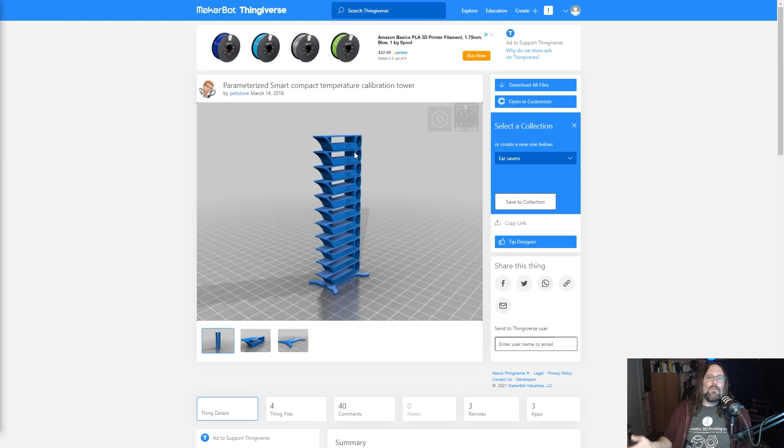If it is, it's cheap filament, throw it away. Or if you're printing some of the wax stuff, I'll give you that, it could be good filament. But if you're printing below 200, you might want to look at the quality of your filament.

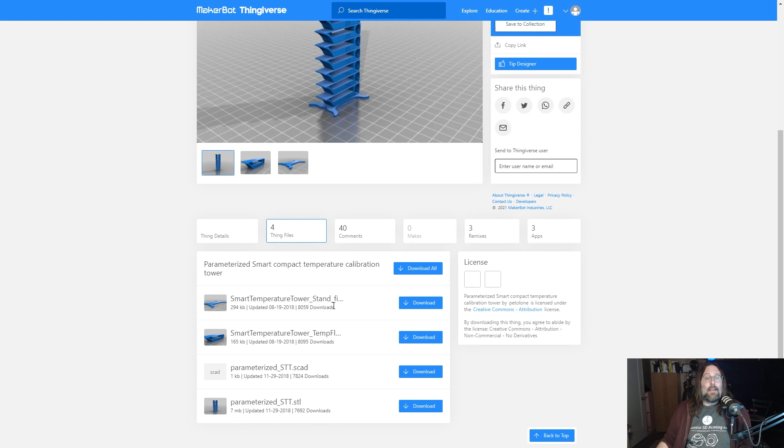The other reason I like this tower particularly is if we scoot on over to the file section, there is a file. So this guy here, this parameterized STT, it is the full tower. That's the one you see in the Thingiverse picture. It will give you the model for 225 to 175. But this is my favorite thing about the model: these three things. There's an SCAD file, and then there's a brick section for the SCAD, and then there's a smart temperature tower stand, which just stands it off the bed a little bit, which kind of complicates things, but it's not too bad.

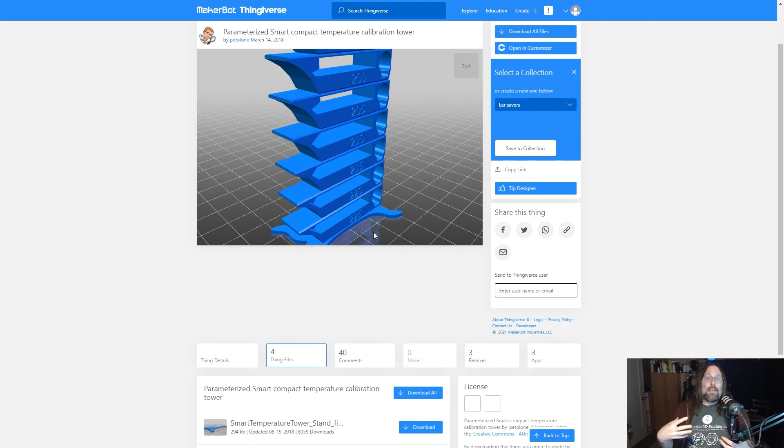But the idea of the temperature tower is basically that when you print it, the printer changes to the temperatures listed on the front of the tower. So we can see here at the bottom of my tower, starting at 225, and as I go up, it's getting hotter or cooler and cooler and cooler. Now you need to start hot to cold, because if you start it at a temperature that your printer can't extrude at, everything will fail on top of it.

Now, this particular tower does a really good job with bridging. So you can see that there's a cooling bridge that takes part, so you'll be able to see if the filament is printing warm enough to bridge or too hot, too cold. It has these nice little spikes to show you the points and how fine of detail and the cooling effect it's going to have on those points. The stringing test happens between these gaps. So that's why it's very important that you don't clean these models up, because you're not actually going to learn anything from them if you clean all the stringing off.

Now, when I showed you the example, my example only went up to about 210 degrees, and that's because I know for a fact the filament I'm printing with is between those ranges. So I'm going to download all these files, I suggest you do too, and then we're going to get right into the nitty gritty of how to do it. So just go ahead, download all these files, and I'll see you on the next screen.

Hey guys, David on the next screen here. So the next thing we're going to download is OpenSCAD, because I am going to show you a little bit about how to customize this. There are a few ways to do it, but OpenSCAD exists to make this quick and easy.

So head over to Google, grab OpenSCAD in your search, and then hit downloads. From here, we can just scroll down, and then depending on your operating system, obviously you're going to pick the one for you. I'm 64-bit Windows, so I will grab the 64-bit Windows installer and just save that. I'm going to run the installer here. There's nothing magical about it, it's probably one of the most boring installers on the planet. If you do see the UAC window, just click yes, it's just making sure you want to actually install this because your computer doesn't quite trust it. So literally this installer is you hit install and you wait a second and then you hit close.

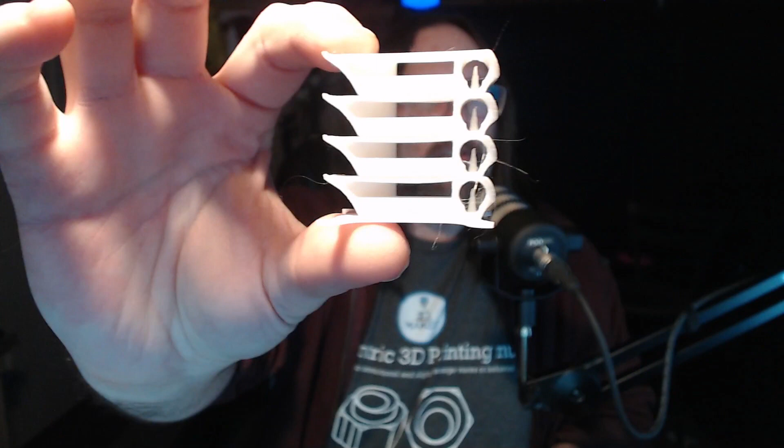I do want to make a quick point about temperature towers. We talked a little bit about why, and I want to talk about how many I've printed and when I've actually used them. This little guy here I printed for this video, and it's white and a little blown out, but you can see it's got a little stringing until it gets to the very top one, which happens to be 210, which is good news because that's what I print my filament at.

And then you can see artifacts on them as they go up and down and more stringing. I'll talk a little bit about those as we go through, but this is actually the second ever temperature tower I've printed in the 4 years that I've been 3D printing.

I like to use calibration models, and I'll tell you why in a second. When I say calibration, not necessarily benchy, like benchy and Astro Print Rocket, something that exemplifies all of these features at a temperature that I trust for most PLA.

Without going too far into it, PLA will print at its hottest when it's in its purest form, meaning the closer you are to a virgin PLA material, the hotter you have to print that filament. If you're printing your filament in the lower range between 190 and say 200, or even 185, your filament is probably not all the way virgin PLA material. It could have some recycled stuff in it. There's nothing wrong with it, but this is where it comes to knowing your brand of filament.

So the reason I haven't printed a temperature tower is because I trust the manufacturer. When I buy Protopasta, I expect Protopasta's claim of using virgin raw material, which they do. It's great filament. When I buy Matter 3D filament, I trust their claim. It's great filament, and I know for a fact I'm going to be printing in the hotter range.

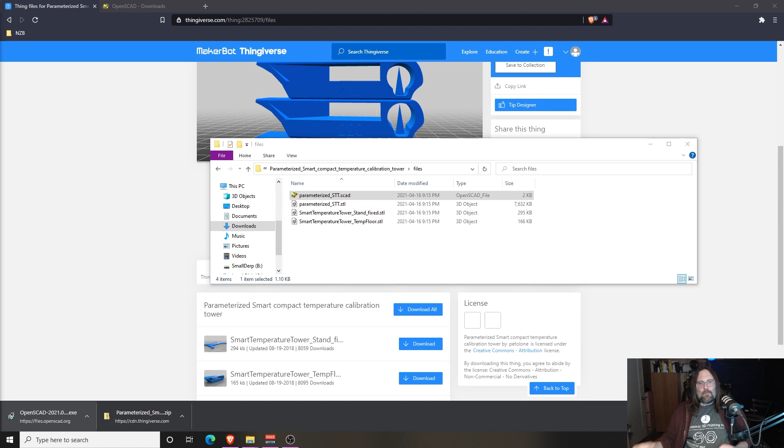So I'm going to open OpenSCAD. I just double click it. Since it's the first time, it doesn't know, so I'm just going to pick always open OpenSCAD files with OpenSCAD. I'm just going to click OK, and we'll wait for that to open up. And we are greeted with a screen that, well, basically looks like this.

Now you can see here that it's generated a temperature tower, and it's actually generated the temperature tower that's on Thingiverse.

I just really quickly want to go through a few controls so that you know how to get that image if you don't see it. Over on the left-hand side, there's a preview button, hotkeyed to F5, the square with the play arrows to the right. If you hit that, it will generate a preview of the file you're building.

OpenSCAD uses programming logic to build STLs. The reason you need those two files inside that folder is because it's using those files to stack, and then the base of the model is the floor. So it's actually calling those in this script.

We're not going to get into OpenSCAD too much. I'm just going to show you how to use this to change the size of the tower if you didn't want to go full. So let's say you want to print a quick tower.

We can open on the right side here, parameters, and you can see here that it gives us our temperatures. So we have 175 and 225. 225 is a pretty good top temperature. We don't want to play with this T-step, that's actually giving it the gradients we want as it's stacking them, so just leave that number alone.

But if we wanted our temperature tower to stop at around 200 degrees even, which would save us time, and we know our filaments for the most part like to print between 200 and 215, let's say, I'm going to change that to 200. Now you can see I changed it on this side and everything has changed, and it updated my preview as soon as I clicked off into the gray space.

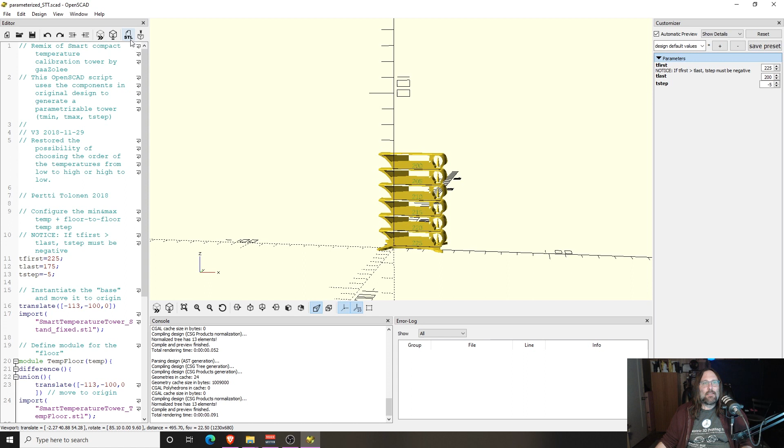If we look on the left-hand side here, there's an STL export button. If I click it, I get this error down here that says, whoops, try rendering it, press F6 — they make it dummy proof. You can press F6, or the square next to the preview button, the one with the little cursor symbol, is the render. You click that, it will render it.

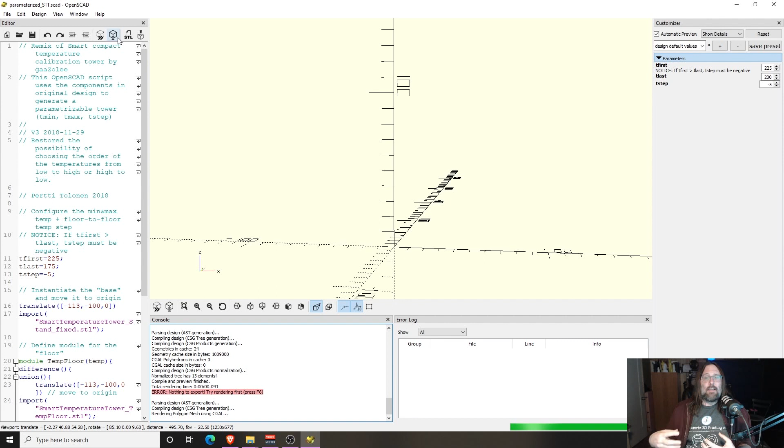It disappears briefly because it's actually making the model now, so we're not in quasi preview mode anymore. It's generating that STL — it's mending the mesh, making the triangles, putting it all together for us. Once that finishes, we can then click the STL and save it.

You're going to hear the chime, the render will show up now, and we can see that it's ready to go. We can click that STL button in the top left here. It will open the window, and it's literally called parameterized STT, which is what the other one is called, the one we downloaded. I'm going to save it into the same folder, but I'll call it new so we know which one we're dealing with.

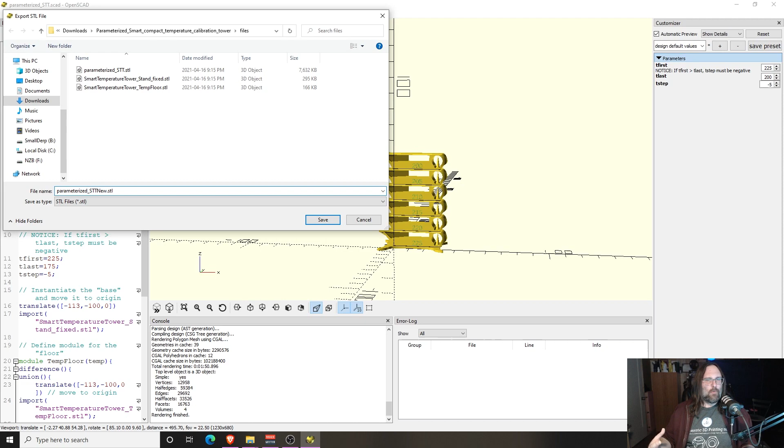So we're going to bring both files into Prusa Slicer, and I'm going to show you how the actual temperature tower script works. That's right, you use a script in Prusa Slicer — you use a script in Cura too, but it's a little more GUI based to make it. Now I've written a script that actually does this in Prusa Slicer, so I'll take you there.

We'll show you first. I'm going to open both models in Prusa Slicer just to show you how it looks. Once we're in Prusa Slicer, we do have to decide which printer we want to use these models on first. This CR10S for me is just fine, I'm going to use a CR10S — this is the default Prusa Slicer CR10S profile.

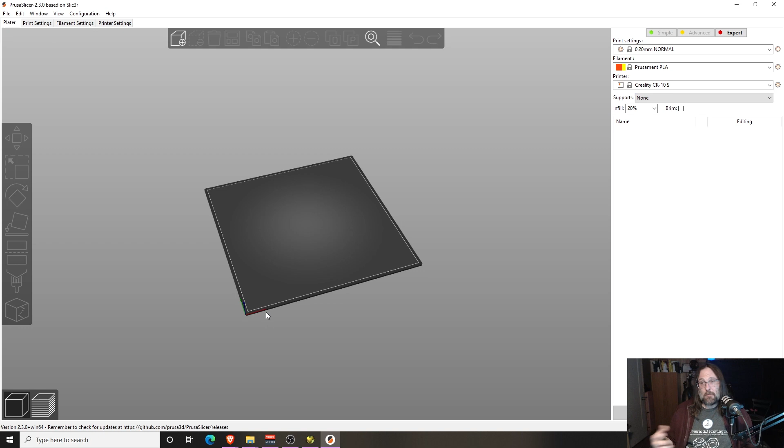I'm going to change it to 0.2 layer heights. This is also important because the script I made for this is in 0.2 increments, so we want to make sure that that script is correct.

Next, we're going to bring our towers in. So I'm going to bring both of them in, I'll just drop those in there. We can see that I have two towers, a short one and a tall one.

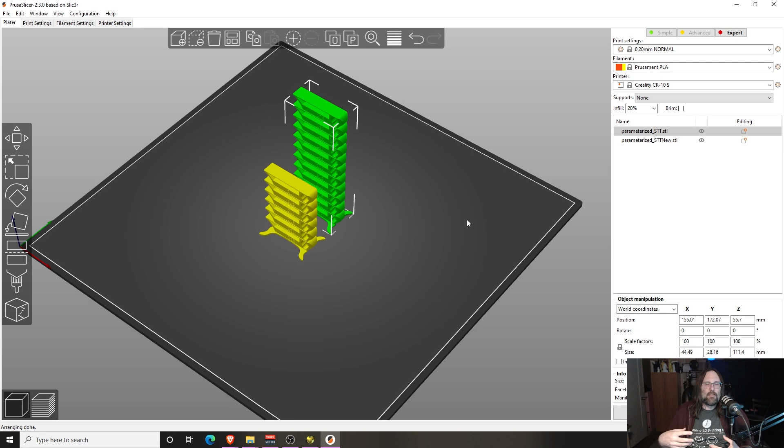If you are unsure of what filament you're using, or what the actual low temperature is, if you haven't experimented a little bit with that brand or type, do the tall tower. The worst that happens is it starts failing at the lower temperatures, so the higher blocks. Other than that, they will both work.

I'm going to delete the small tower. We'll continue the example with the big tower for now, and we'll hide the small tower — we'll hit A, and that'll take it off the build plate.

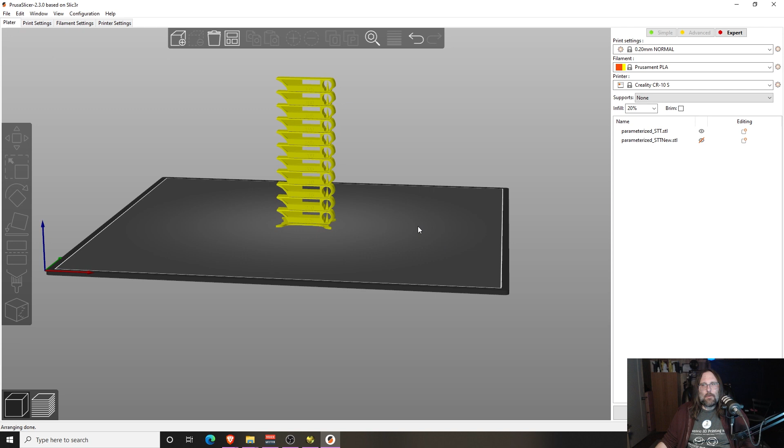It actually just moves it off to the side if you're not familiar with what it does. So as soon as you hide it and arrange the models, it moves it off to the side.

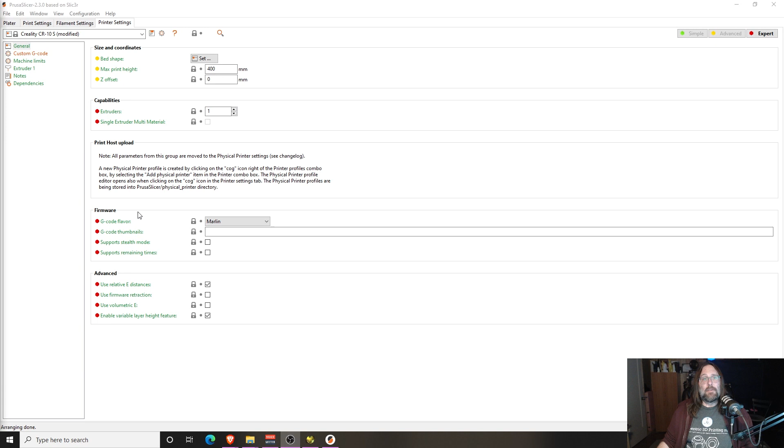The next thing we have to do is change the Gcode, and this is where the scripting comes in. So we're going to click the gear beside the printer settings and click Edit Preset. You can also get there if you click the tab along the top here, so that's another option.

Once we're in the printer setting tab, we go down to Custom Gcode, right here. We're going to go to the Before Layer Change Gcode, and we are going to paste the script that I have put in the description for you. You can paste the whole thing, it will just replace what's there. There's no problem with it.

Just so you know what's going on, it puts a label, a name before layer change, so you can see where it is in the Gcode. It resets the extruder and then it posts the layer name, so which layer you're on.

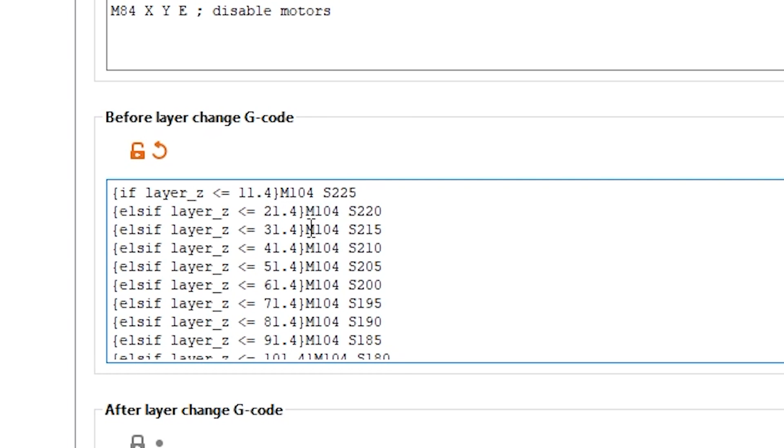Now this code underneath this else-if is basically going through, and you can see here, if it's below layer 11.4, it's going to set the temperature to 225. So as soon as I go beyond layer 11.4, it actually sets the temperature to 220 until it goes beyond layer 21.4. And then it sets the temperature to 215, and so on and so forth.

So as soon as it gets bigger than this number, it moves down to the next line and sets that temperature. I'm going to show you where I got those numbers from, because I am sure you're thinking, hey, what? But basically it goes through until the highest possible place it can get on the model, which is the top of the model, and then it ends. So the end-if makes sure that nothing happens, and then your normal Gcode finishes the script for you.

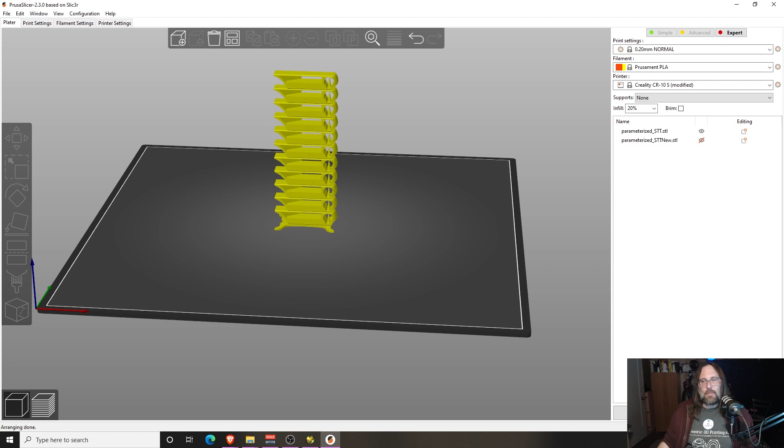So let's go back to the plater and we'll slice this model, and I will show you exactly where those crazy numbers come from. First off, on the right hand side here, we can see that we have this layer slider.

We can see there's a number at the very top that says 111.4. If we go into our printer settings and look at our custom Gcode, at the very last line of the script, we have: if the last layer is below 111.4, please set the temperature to 175. Again, this is the big tower, so that 111.4 is the top of the model.

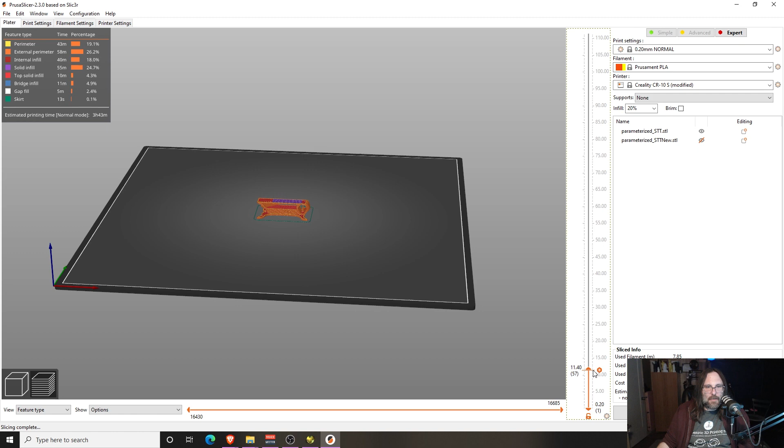And once you slice that, you can see all the layers change with this slider. So if I go down and then I want to see where my first layer change actually happens, I'm going to go up, up, up, up, up, and we want it to bridge. So here's the bridge, and then we're just going to keep going until it starts printing the next part, which is right there. So I'm going to come back, and this will be the next level.

So I'm just going to zoom in and show you this in really good detail here. We can see that if I come up, it does our bridging test and then it starts the next layer. Well, we want it to shift temperatures as it starts the next layer. The reason it's not a big deal that it takes a little bit of time to switch temperatures is because we have about 6 layers before the bridging starts.

And that's really where the next test is really important. It's going to change in time about at the bottom of this cone so that we actually get stringing tests properly as well, which is cool.

So we can see here that this first layer change is 11.4, so I have 11.4 in my sidebar there. And if I look at the printer settings, and I go to my custom Gcode into my before layer script, I can see that the first change happens at 11.4. So anything up to layer 11.4, that's what this less than or equals means.

So if it's less than or the same as 11.4, it will be 225. So the very next layer that prints after that will be 220. And we can check till when: that's 21.4. The sweet part about this is after you do 2, you can see the pattern.

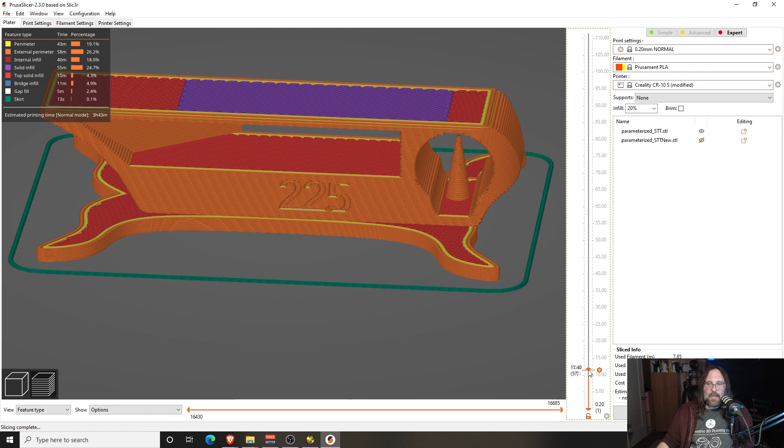The first one's a little harder because there's a base. But after that, if we can go up to 21.4 on our slider, so we'll just pull it up to right to 21.4. And I'll just back it out and move it a bit so we can see it. So we're coming up on 21.4 now, 21.4.

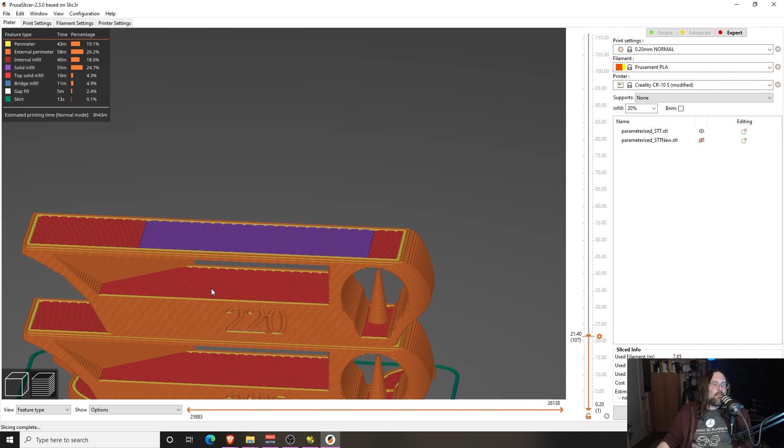Did it, and here it is again. So that means you can just add 10 to the number indefinitely until you get to the very top of this tower. So every one is basically going to be 10 millimeters and then it switches. So it's easy to do, but the script is kind of tricky.

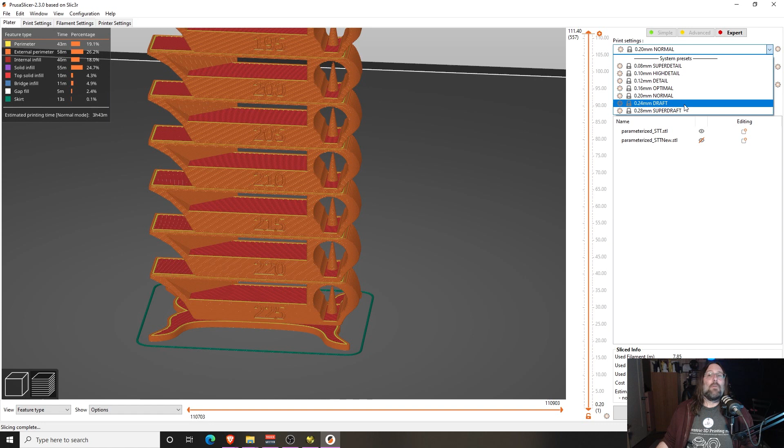Now, if you wanted to change your layer height, by all means you could, you would just need to change the script. So if you wanted to do a faster temperature tower, say at 0.28, let's slice that tower. In Prusa, we're just going to go down again and find where that layer change is. So it's right here.

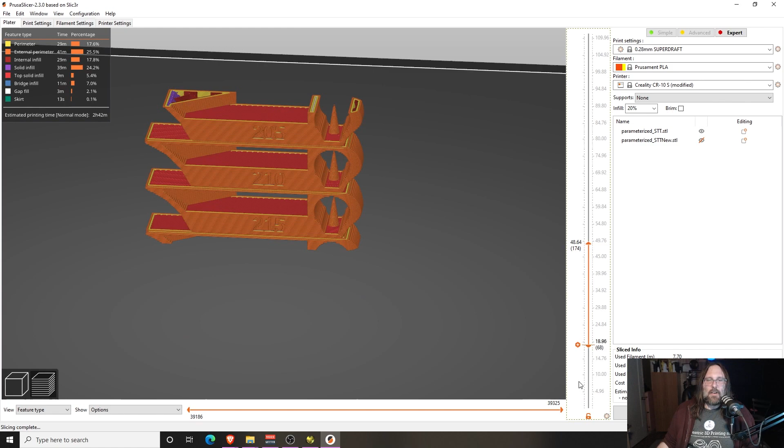You can see here, even at a 0.28 layer, this one actually works out. But if you get into weird non-magic numbers, you'll just have to change them. So you can print a temperature tower a little bit quicker by changing the layer height.

However, when printing your temperature tower, it is always best to use the settings you want to use in most of your prints. If you're going to be seeing what temperature is best for bridging and you usually print at 0.28 layer heights, do the temperature tower at 0.28 layer heights, because layer height can affect bridging. There's more material hanging across there, so it can sag more.

So make sure you're doing your tower at an average speed that you print at, and then make sure the layer height lines up. Hey guys, just wanted to mention before we jump into Cura that script is height agnostic of the model, meaning you can make that model the 200 or the 175. That script can go in Prusa, and no matter what, it will work, it'll just cut off when the last layer was. The nice part too is as long as you don't hit save profile, once you close Prusa, that script goes away, and the next print job's not going to be a fake temperature tower for you.

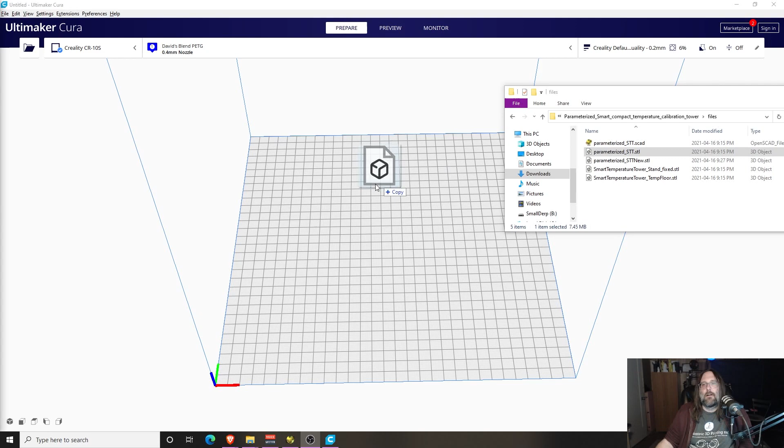So off to Cura we go. Cura's here, here we are. We're going to drag our model into it. It's going to take a second to open in Cura, which is fine, but we can see it brought it in okay. Here's our temperature tower.

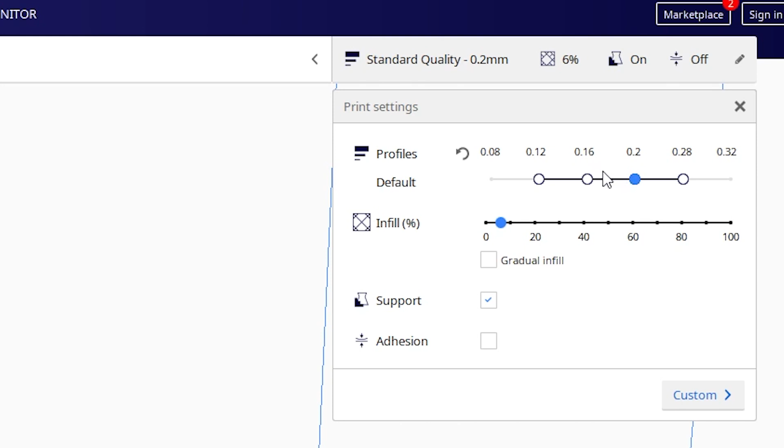So the next step is going to be getting this tower sliced. Now we're going to make sure that we have our layer height where we want it. If you're in the default view of Cura, you can see up here where your little sliders are, so you can set it to 0.2 if you wanted. I also have other settings inside of Cura, so if you click custom and then go quality, you can see what layer height is. So 0.2 is what we want.

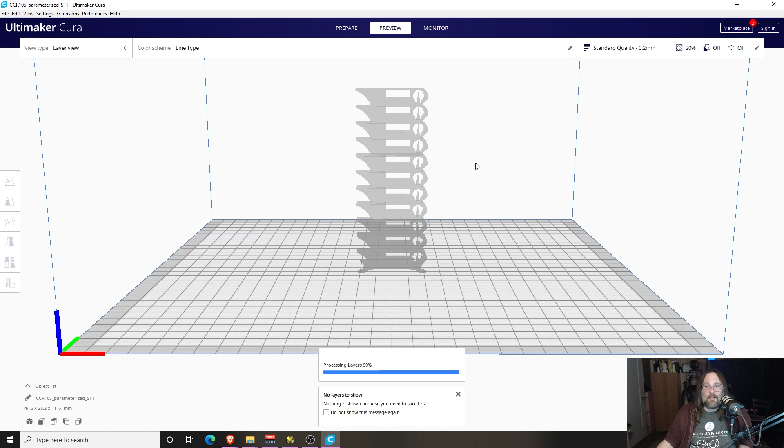We're going to hit slice. We're just going to let this basically do its thing on this model because we want a few tidbits from this, especially if we're going at this fresh. So once it's sliced, you're going to hit preview. You can use preview in the top tab or at the bottom corner there.

Again, we're kind of going to do the same thing. We're going to look at the model, we're going to use the slider. And we know that the model is 557 tall, so that's 557 layers of print. So you can take a pen, a pencil, whatever, and write down 557. If you're on your computer, you can actually look at it, that's fine too.

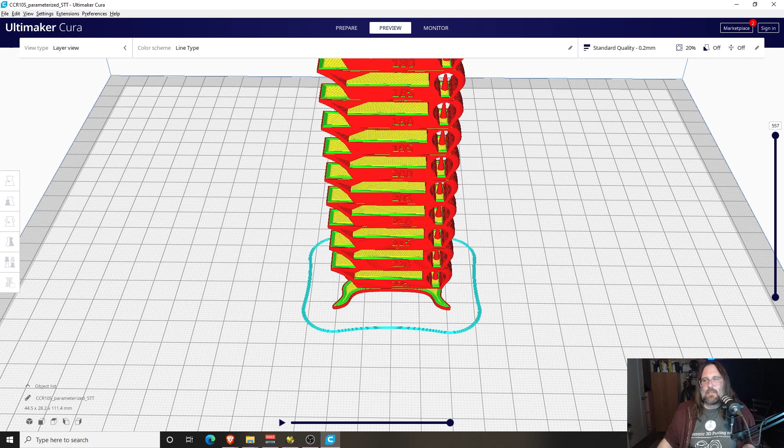So we're just going to slide down now to basically our first layer where it ends. So here we come up and we're looking for that bridge again. Just going to rotate it, we'll zoom in, let's see, that might be a good angle. So let's come up and we're going to look for that bridge. Straight right there-ish, and then there's the next layer. So I know that one layer before this, so 57, should be my sweet spot.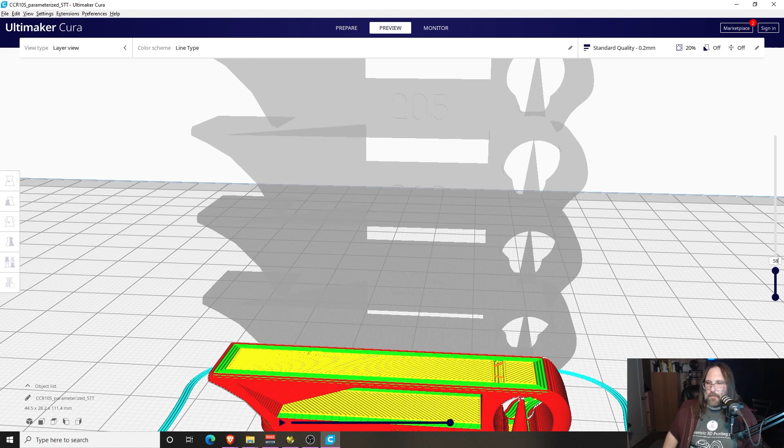Now, the fun part with Cura is getting it to play nice with you. So 56 is there, can I get to 57 manually? I can, so 57 is good. If I type in 58 there, it's one too high. So 57 is our sweet spot. Now if you want to know how to type in there, you just double click and you type. It's pretty sweet, so 57 is where our first layer ends.

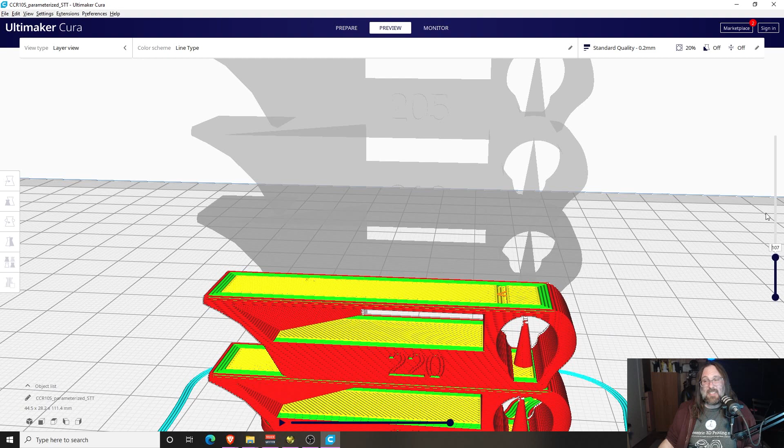So we want to go up now into where our second layer ends. So it's right here, let's go down. And I have 107, so let's go to 108, that's too many, so that's just double checking. And 107 is perfect. So now we kind of know our pattern, it went from 57 to 107, which means it's 50 every time. So every time we want to switch layers' temperatures, it's 50. So now what we're going to do is we're going to go back to prepare just because.

So now that you're back at the main window, we figured out our first layer change was at 57, and then we know it was 50 again, so 107. Those are important numbers. Just remember 57, 107, and I'm going to show you how to do it.

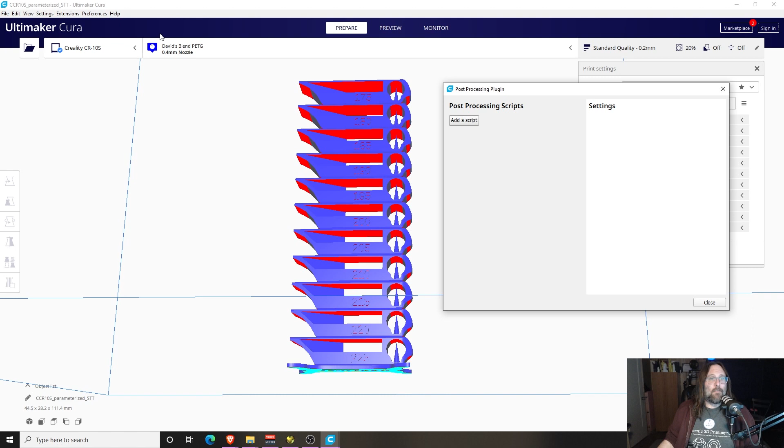So we click extensions, post-processing, and modify Gcode. In here, we clicked add script. Now we're doing the first one, change at Z experimental. It's been experimental forever. We're going to change at a layer height, a layer number. Now we want to make sure that we change the target layer and all subsequent layers. That first option, if we don't do that, it's not going to set the temperature right for the rest of the layers, and it actually flips back to the temperature before.

And then the other thing we're going to do is just change the extruder temperature here. So we know that the first change of temperature happens at layer 57. That's the last layer, 225, layer 58. Boom, would be the next layer. So let's go to layer 58, and we're going to set that temperature to 220. It's as simple as that. I'll do the next one, and then I'll do the rest off camera.

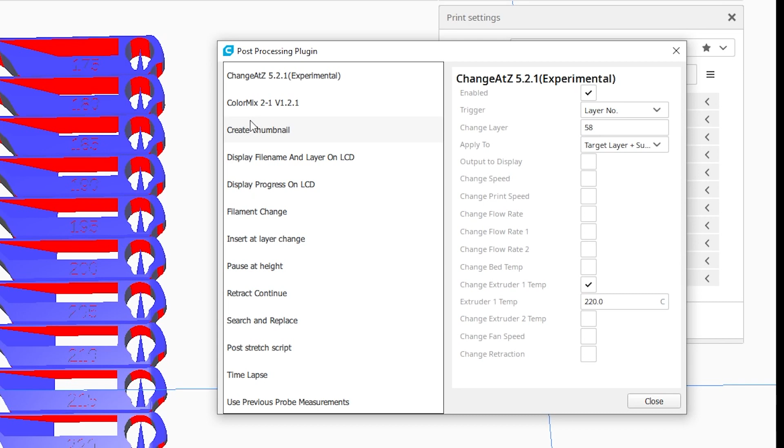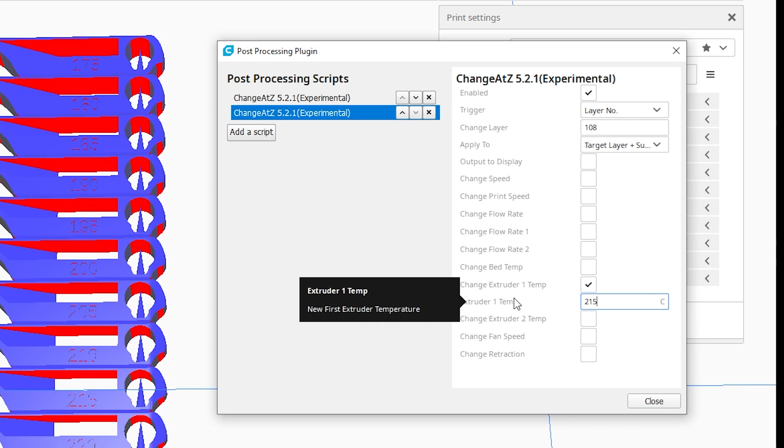But we're going to click add script. We're going to click change. You see it just adds another one. We're going to do change at layer number. We're going to make sure that this is set to subsequent. Before we even go up here, we know that it was 50 plus, right? We were 50 on our layer. So if we changed it at 58, because we knew that's where our layer temperature was, we'll go at 108 for our next one. So we're going to set 108, and our temperature, the first one would change to 220. So the next change is going to be 215 for the next subset. So now that's going to change it, and it'll go on and so forth.

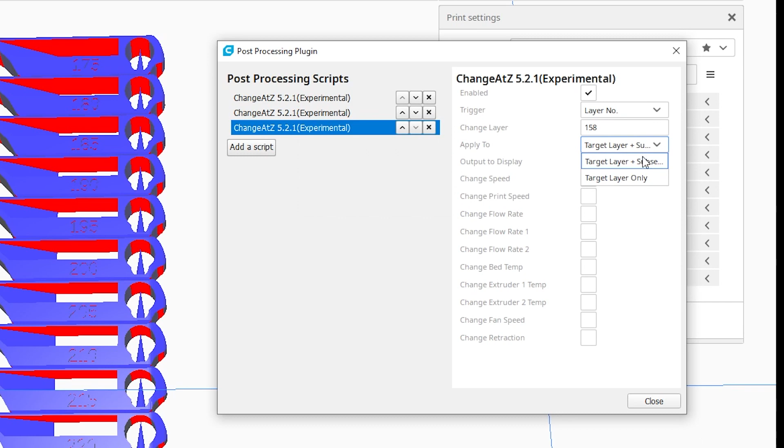I know I said I would do the rest, but I'll do one more. Add script, change at Z. We're going to do layer number. And this one, so we can look at our last one, it was 108, so we had 50. So that's 158 now, and that'll get us up into the next block. We want to make sure it's set to subsequent, which it generally is. And now we know that we did 215 last time, so now we're going to be on 210. So we have a change from 225 to 220, 215, and 210. And we can see as the temperature goes down 5 every time, the layer goes up 50 every time.

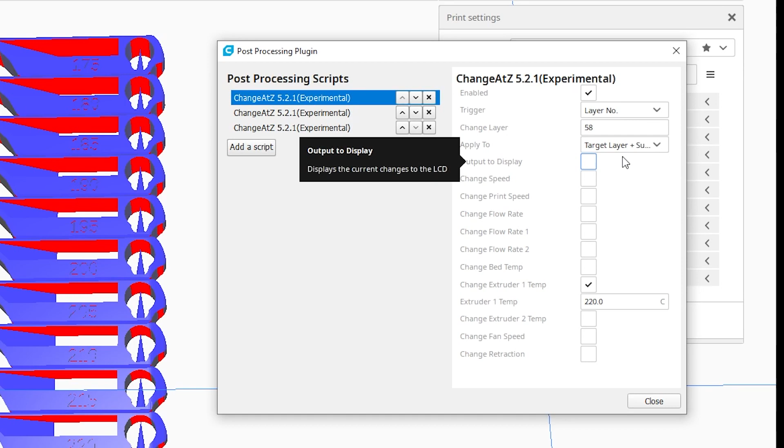So we started on 58 as our first change. So everything before that is going to print at the base temperature, so we need to make sure that we set our base temperature of our print job. Okie dokie, so they're all in there. Once they're in there, you can click close. It is important to remember in Cura, when you close Cura, it does not clear those scripts. So you have to come back in and clear them after you're done.

So those are up in extensions. There's this little wrench that appears down in the corner here, and it actually has your scripts. If you click it, it opens the post-processing script wizard. You can shut them all off really easy. It's a reminder, so make sure you shut them off.

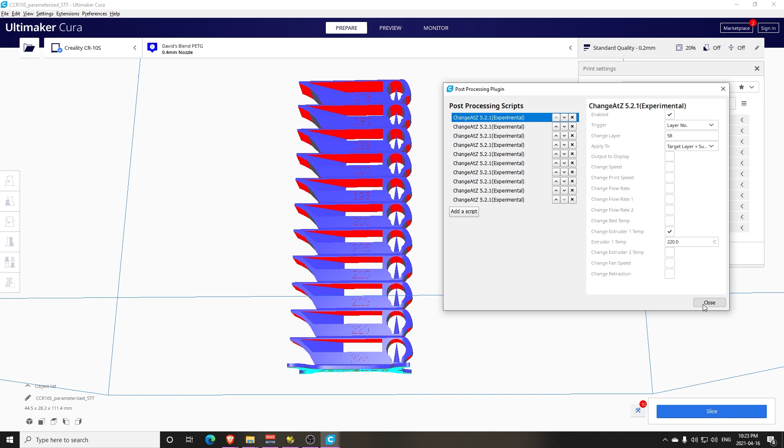Now we have that done. The next thing we want to make sure of is that we do set our first layer temperature. It's easy to do. We just come to the material, and we make sure that it's set to 225, which it is, and that means our first one will print properly, and then the post-processing scripts will change the rest. We hit slice.

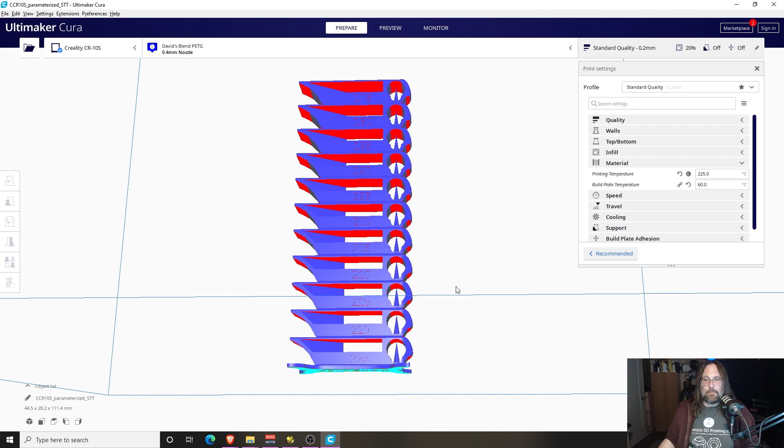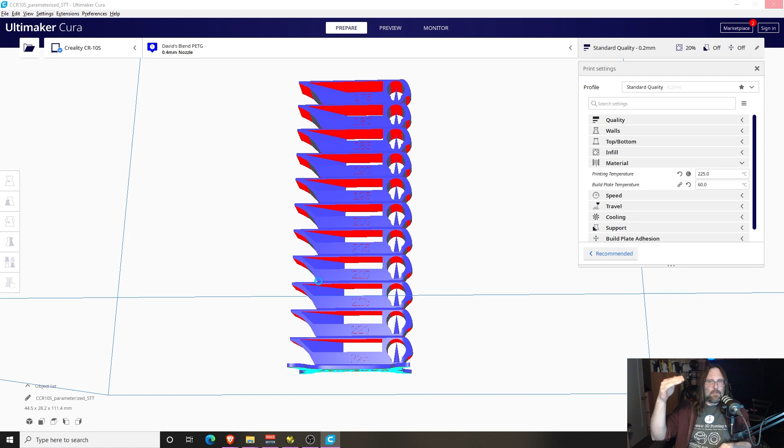And after the slice process, we will save the file, or you can print it, whatever, but we're going to save it to disk. I'm going to save it just to my folder there, and once it saves, we'll take a quick look at the file. It's important to note that the Cura file and the Prusa file are going to be similar in the fact that it just puts those temperature changes in at every layer, but remember the Cura file will say sliced by Cura and the layer is identified instead of layer Z. It has a little bit different of a label, but we'll take a look at this one and then I'll show you exactly what we're looking for on the temperature tower.

So here is our sliced file from Cura. Now, here is where it sets our initial temperature. We're right at the top of the file. So line 16 says M104 S225, and it's going to wait. And that's what this M109 S225 means, is wait for the temperature, and then it'll move on after that. So what we're really curious to learn here is actually if it's changing at the layer we think it is.

So I'm going to highlight layer 0, copy that, and do a find. We know the first change we added was at layer 58. Let's look at layer 58, and you can see it has an M104 S220, which changes the temperature to 220. That's exactly what we want.

Curiosity killed the cat, so let's see if layer 59 is also set to 220. It should be. Look at layer 59, and there's nothing there, which means it's still set to 220.

The next change was 50 layers later, at 108. Let's check this one for fun. And would you look at that, S215, we're changing the temperature at layer 108. Let's check layer 109 again, and again it didn't change, which means it stays set until it changes again 50 layers later.

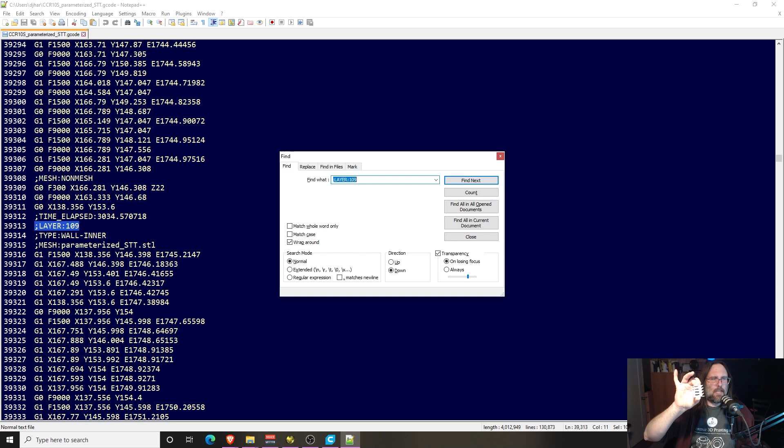So let's jump into our temperature tower, and let me show you what we're looking for, then we'll wrap this up. I want to talk a little about what you're looking for on this model.

Don't clean these up, take them as they print. You can see on mine, I printed a mini version. I started at 225 at the bottom and worked my way up. You can see I got significant stringing, wispy strings on the bottom there. Visually I can see them up to about this layer here. The top layer is 210 and the bottom layer is 225.

You can also see that the little spires represent cooling. You can see they're kind of deformed, that one's deformed, this one's deformed, but once I get up here it actually starts getting straight. So at 210 it gets better.

The other thing we're looking for is bridging. There are bridging sections, it's kind of hard to see on camera, but the bridging section runs along the top of every section. You can see it's sagging, especially visible below 210 and below 215. It's actually sagging on the bottom one too, but the camera's getting a little low there. It sags pretty bad until we get to about 210, and that's where it starts to get better.

Now this is an important thing: as you're doing these models, you might not get perfect results, but if you get better results, that's where you want to start printing. When it gets the best, that's where you print. So we have bridging and a little bit of overhang happening.